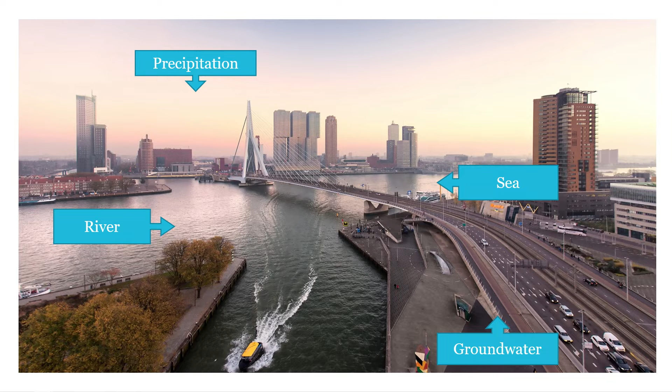Flooding in Rotterdam. Yes, we are a delta city. We live right next to the river, right next to the sea. So water is a real challenge for us as a city because water comes from four sides. We have the river flowing to our city, and when snow starts to melt in other countries, the water will eventually flow through our city. So we see rising river levels, and even areas of the city that flood maybe once or twice a year. And the people like living next to the water so much that they even accept things like that.

Then the sea. Luckily we have a storm surge barrier in the west, the Maeslantkering. When that closes off, the city is totally protected from the sea, at least for now. Groundwater can be a challenge: low groundwater tables during periods of drought, and we have those old homes that are founded on wooden poles, those poles rot and the house will shift, or higher groundwater tables when your basements will flood. And a lot of the basements in Rotterdam are transformed into bedrooms and kitchens. You don't want that.

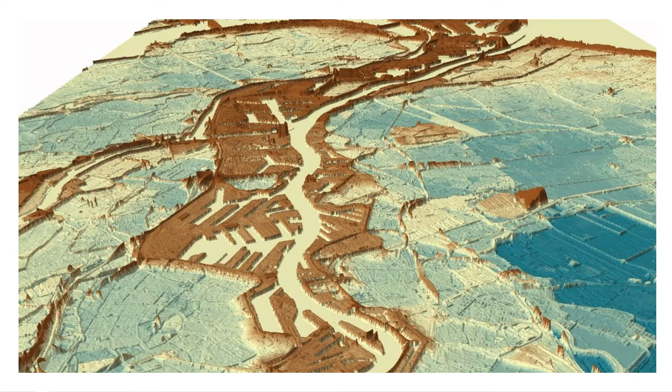Precipitation, rainfall is a real challenge for our city. And it was already said this morning, 85% of our city is below sea level. So everything that's blue in here is below the level of the river. So we have quite a good drainage system and around 1,100 pumping stations to keep our city dry. But we see with climate change and high intensity rainfall that our sewage system cannot cope with those amounts of water. So we have to do something to our city.

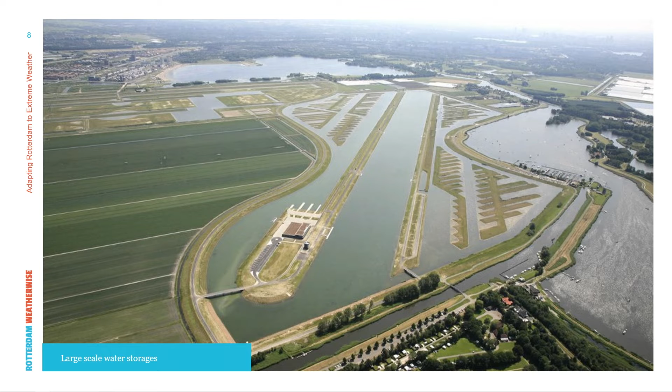So we have to work towards a climate adaptive city and really integrate climate adaptation into our urban planning. Let me give you some examples of that. It's about large-scale solutions, and this is problematic in a densely built city, large-scale solutions and multifunctionality. What you see here is a big water retention reservoir, but it also doubles up as an Olympic rowing track, so it can be used for rowing competitions.

And it actually helps in improving the retention capacity of our polder system, but it's outside of the boundaries of the city of Rotterdam. But we don't have space to do things like this, so we invest as a city in solutions that help in keeping our city dry, even if it's outside of the boundaries.

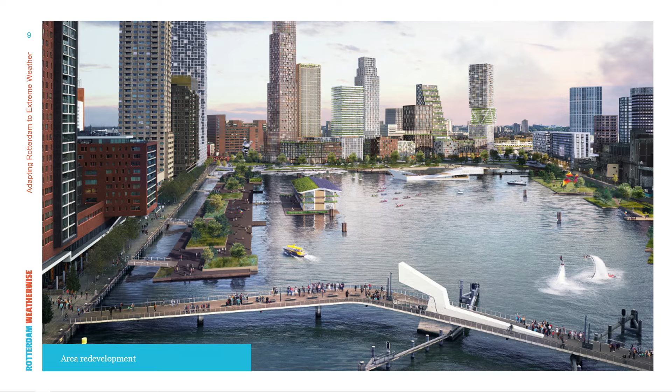Also, area redevelopments. We have a lot of former port areas in the city, and the ports gradually moved towards the sea. Unused port areas. This is Rijnhaven, and actually in the middle is the floating office of the Global Center on Adaptation. It will be transformed into a tidal park, so it increases the recreational value of the area. It's also quite interesting to develop there for real estate developers, but it also helps in flood-proofing the city, so it also has this multifunctionality in mind.

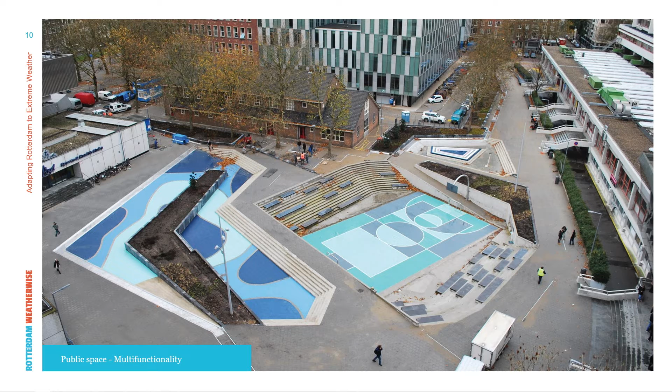And also on a small space, this is the water square. This was the first one, it's already 10 years old, but we have a lot of these all around our city. They all look completely different because we always design them together with the citizens. So they serve the purpose of water retention, and at the same time they can be used for sports and theater. And on this one, there's even a church that does services in the big reservoir on a sunny Sunday. But at the same time, 1.7 million liters of water can be stored here.

And one thing we try to do is link in with everything that's happening in the city. And a big opportunity for us is sewage renewal. Rotterdam is built on sloppy soil. We have 2,400 kilometers of sewage pipe which keep the city dry. This is really the core of a robust system. But the pipes, they just sink, so we have to renew them every 60 years. So we renew 40 kilometers of sewage pipe every year. So we also open up 40 kilometers of roads every year.

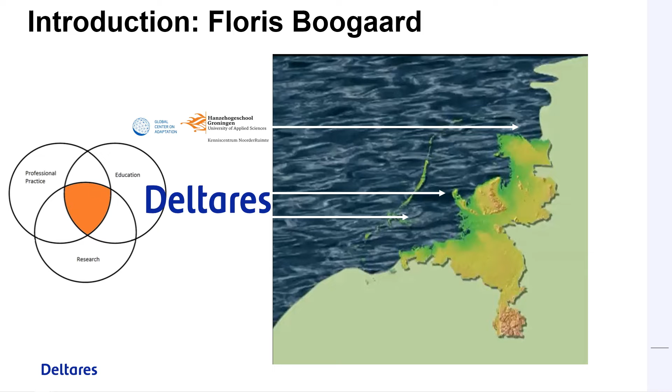Next slide. What I want to talk to you about in a very short presentation is a strategy for integral flooding solutions. And of course, we have a lot of challenges. We have a lot of solutions that we can share. And I think a major strategy would be to analyze the problems and the solutions, going to form an ambition, and then as soon as possible come to action.

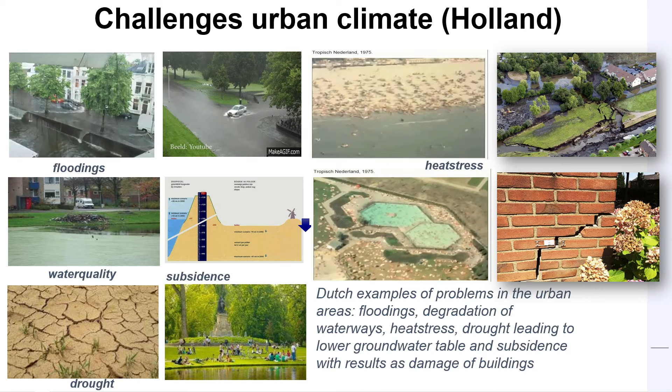Next slide. And just to show you some of the challenges that we face, Johan already named them, so I will go quickly over them. Of course, it's about flooding in this section, but if you cope with floodings, you will also do an integrated approach, also tackle heat stress or drought or subsidence, being in sinking cities, for example. And also, next slide, it has a very large effect on water quality, air quality, urbanization, more paved areas in the city that we have to solve.

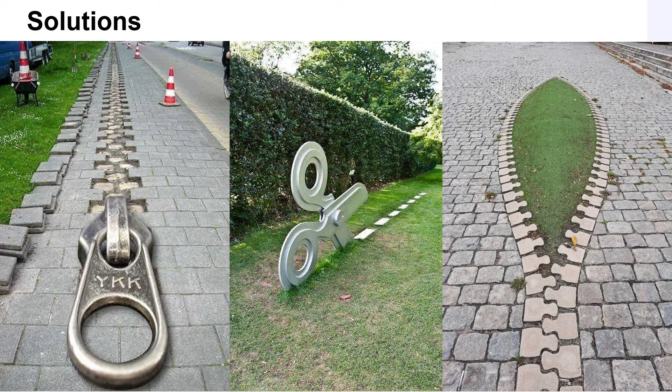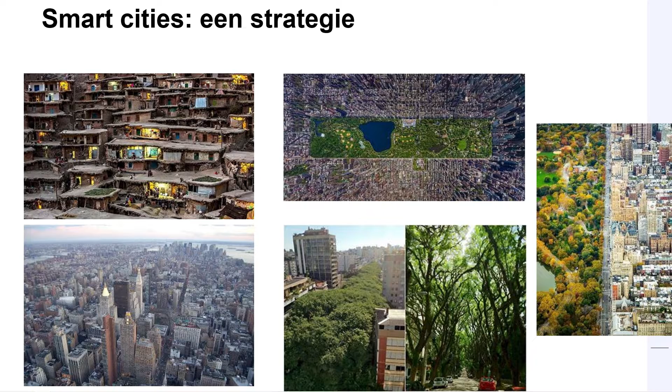So next slide. I think these artists visualized very well what we have to do. We have to open up the cities again and give more room for water where it can be stored and slowly infiltrate to the ground. So we tackle floodings, also drought, of course, and heat stress in a lot of situations. Next slide. And then you will see that cities are not planned that smart from the old days, as Johan referred to as well. We tend to give green less space, or just one space, as you can see here. Gray and green are really separated in this case. So one of the challenges is really to go with an integrated approach and to see how we combine them.

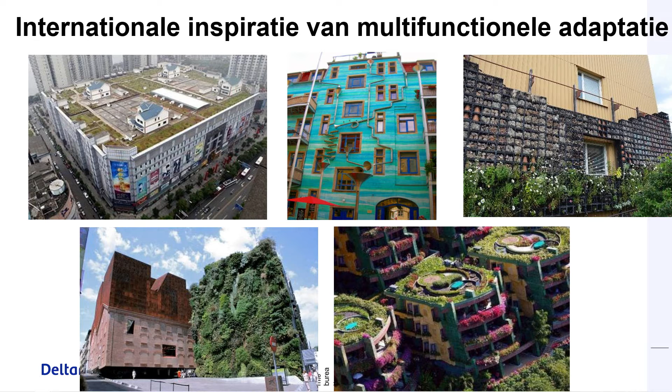Next slide. And there are some great solutions all around the world, as you can see here. Rooftops in China, you see autarkic homes in Thailand that are really self-sustainable. A very nice green wall, one of the biggest in Europe, in Spain, for example. And maybe one of my favorites is the one in the middle. You see some musical instruments on a building in Dresden. When it rains, it makes music. And every time it rains, it makes a different symphony, so to say. And people go out in the rain and tape the noise that it makes. So it should reach participation and stakeholders in this case as well.

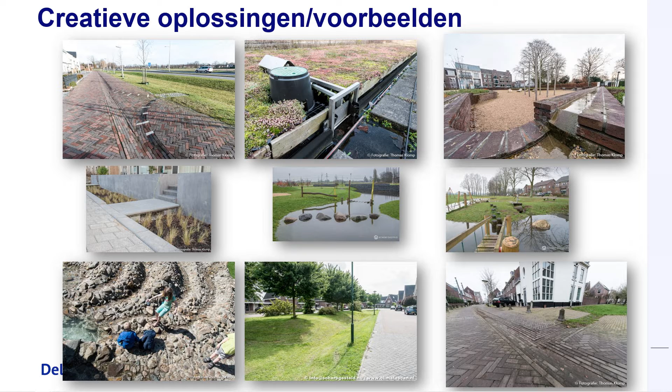Next slide. So there are a lot of solutions that you can find: swales, rain gardens, water squares, permeable pavement. Those are all small-scale solutions that you can implement in the urban area. Next slide. But of course, the big challenge is how to make that an integrated approach, because it's not only about the technical means. Most things can be solved in a technical way, but it's also about the infrastructure, or the bottom-up, or the governance, or the participation of people. And these are some tracks that we do at the Global Center on Adaptation, for example, and that is solution brokering. So offering solutions to your problems with inspiration from projects from all around the world.

Next slide. And as has been said, I think one of the main strategies in this short presentation would be first to analyze, see where your problems are, and it can be done by models.

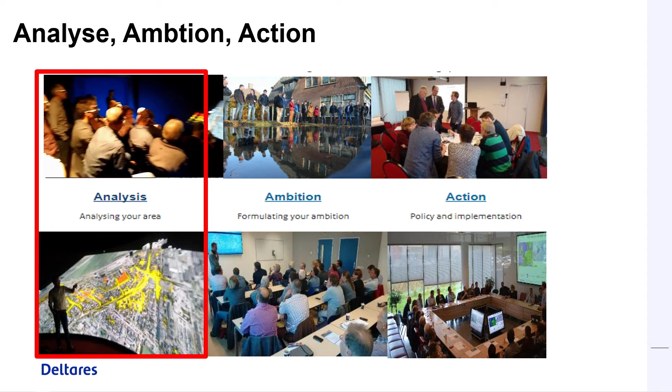I will show you in the next slide. And then you have an ambition, and then you also should go to action. And here's some climate quick scan models. It doesn't have to be exact; most of the people already know where the problems are, of course.

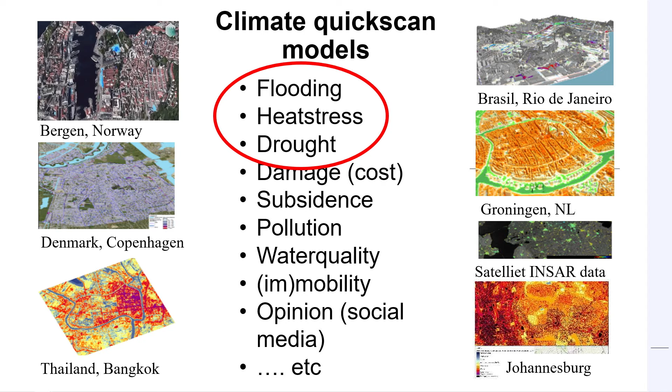And one of the things we're talking about is floodings, but you see a long list of things that you can easily model in urban areas that can benefit from an integrated approach. So it's not only technical, it's also about the opinion, for example. Social media can be modeled as well, so you can see what the perception of people is and combine that in a technical structure. And that's mostly an integrated approach.

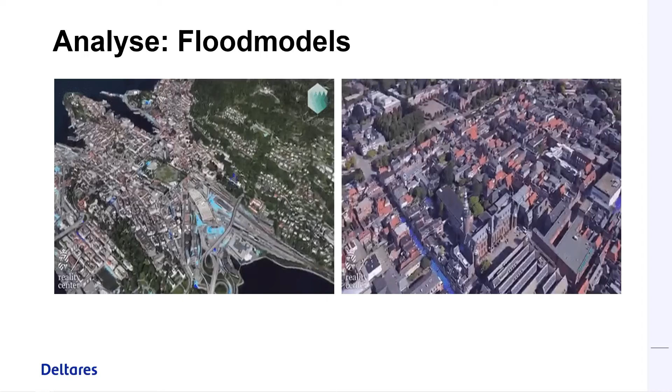Next slide. Here are some visualizations, 3D visualizations, how you can relate to people. You can fly through cities and see where the problems are, so they relate to the problem and are more attentive to give a solution to that.

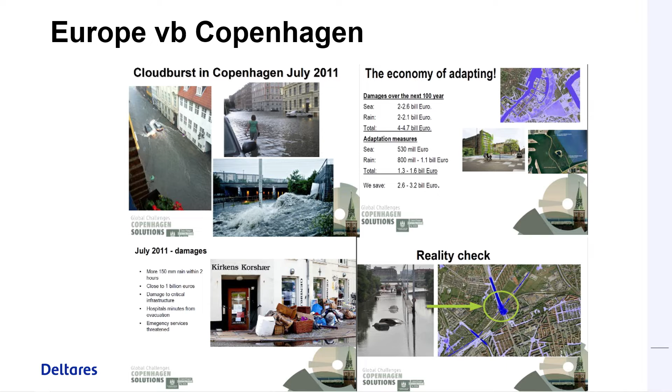Next slide. And it's always good to give an example. Copenhagen is a well-known example. In 2011, there was 150 millimeters in 2 hours on that city, causing billions of damage. And of course, it's quite a best management practice now because they came to action quite soon.

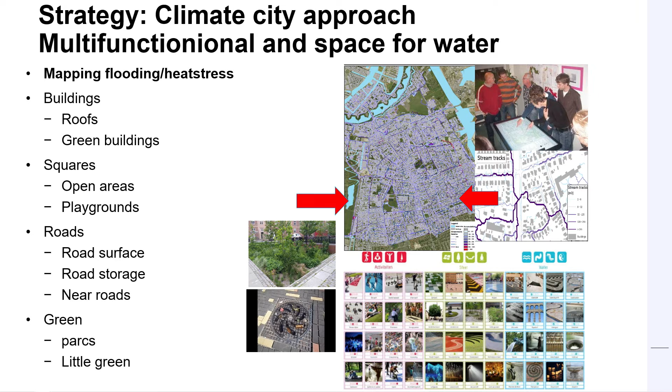Next slide. So I did some flood modeling there, as you could see the models before, and then it's basically a puzzle to see where your buildings are, where's the green, where are the squares, where can you make maybe water squares, as Johan was talking about, or other features to fit that into the city. So you can make it into a fun game, so to say.

Next slide. And of course, there are a lot more solutions. Here's some things in Dutch text because they're Dutch, so maybe it's an inspiration as well. So it's really greening cities, and well, I collect them in a tool that I will show you later, and you can maybe use that, for example.

Next slide. But it's very important to also know that you can implement them, you can design, you see great pictures of it, but also it has to work in the long term. Maybe 60 years, as Johan was talking about, for roads, but some municipalities have more 20 or 40-year cycles. So it has to be functioning, hydraulic capacity, but also people have to like it in the area.

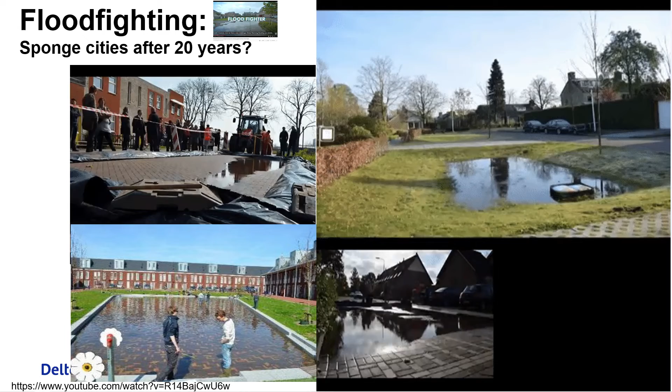And that's where flood fighting comes in. So we flood these systems that are implemented in the Netherlands already 20 or 30 years and see how they work, and we learn from them, and we spread that in international guidelines so you can benefit from that too. Next slide.

And all these guidelines and lessons learned from these projects you can find on adaptation platforms, and platforms are of course location specific. So here you see a lot of QR codes all around the world of platforms that you could use to find information about this, what works, what doesn't work, the lessons learned that I'm talking about. Next slide. And just to give you one example of that is ClimateScan. In this book, there are a lot of platforms that you could use.

Climatescan.org ticks a lot of boxes, so you can use it yourself to share your solutions and also to find specific solutions in Rotterdam, but every city around the world, for example. So next slide. And what is nice, this is a Google-based map. It has over 8,000 now. So you can visit areas like South Africa, as has been indicated, or Europe. You can go to Malmo in Sweden, of course Copenhagen that I showed, and you can share those solutions and get more information about it.

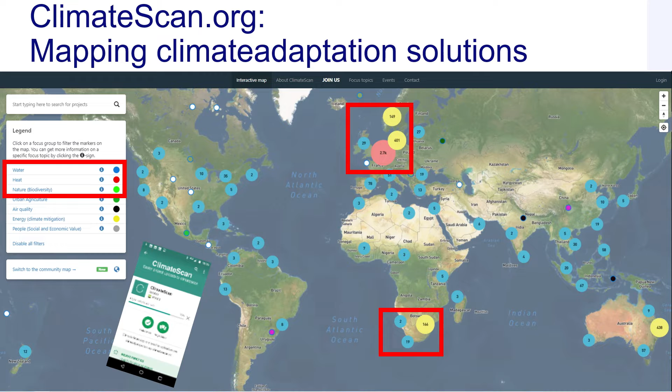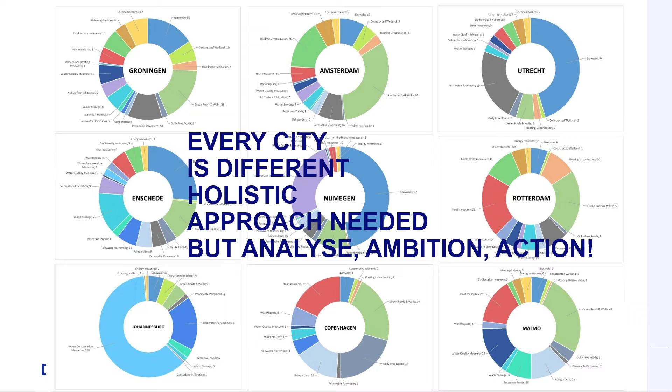Next slide. And with this, you can find the DNA of cities, because no city is the same in the world, so to say. So it needs a holistic approach, an integral approach to flooding. And in these pictures that you see here, also Rotterdam is there, but a lot of other cities as Johannesburg or Malmo or Copenhagen, you can see what the DNA of a city is.

Sometimes a green roof works, or sometimes more bioswales, or Wadi, as Johan called them, which is actually an Arabic name, so probably a lot of you are familiar with it. So with the DNA of these cities, you can find your own strategy, which makes it difficult as well.

But follow the strategy of analyzing, form your ambition, see what kind of cost, governance, or space you have to implement these measures, and then of course come directly to action and learn from it back, as you saw in those tools. So basically that's my message.

Next slide. I hope this has been helpful, that you can use the tools, that you can share that knowledge. Next slide. And of course, I hope, next slide, that Deltares could help you out with all the challenges that we have around the world. Thank you so much.

Thank you, Professor Floris. Indeed, it's nice to learn how we can, as countries, learn from each other, how each country deals with the flooding. So it's a good presentation.

Thank you. Now we will go to Mr. Martin Knuijt, a founding partner of OKRA. His strength is defining strategic visions and scenarios and creating strong spatial designs. He's mostly active in designing complex urban and landscape development projects. So Mr. Martin, you can start, please.

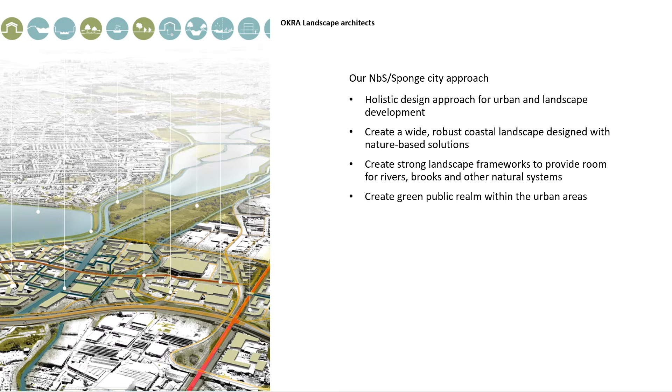Then gradually we started working on the green and the blue structure and defining it with typologies, so that the blue typologies could also be part of the green areas, but also linked to the urban areas, so that urban spaces were also connected to the water system, and the sponge is not only working in the urban area, but in the green areas as well.

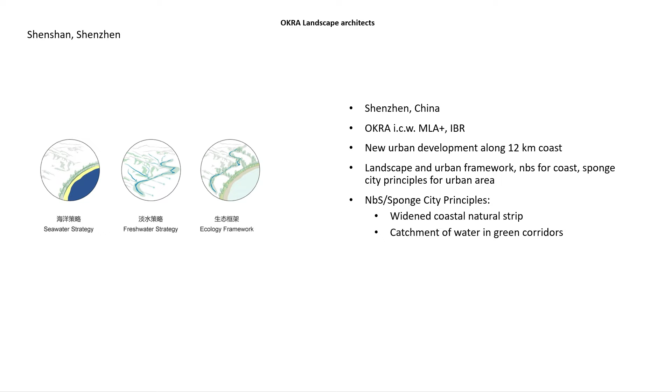For the coast, it was important to create this robust landscape that should be so strong that sometimes it can lose some of its dimension, and sometimes it can gain some extra space, because the sea also sometimes gives instead of taking. It also should provide room for ecology and recreation, so it becomes multifunctional. The wider you make it, the stronger and more robust it will be, but also the more meaning it will give to people.

So that was actually the first asset, which creates, in fact, various cities. So it's a pearl necklace of cities instead of just one big city along the water. And I think here you can see that landscape and urbanity are integrated and bring a new future for cities.

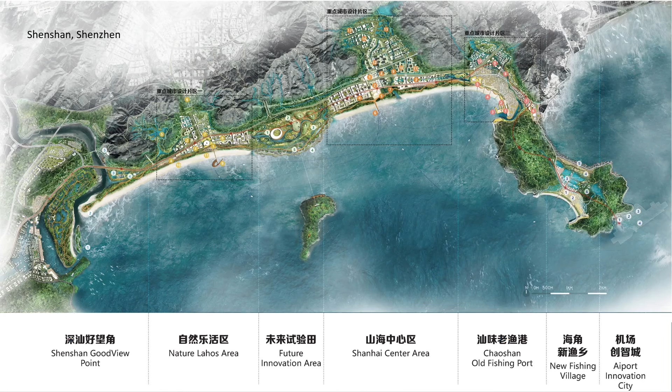The next project that I would like to show is the London project. I was a bit ahead of what was clicked. We're now moving to London, Meridian Water.

That's one of the largest building locations in London along the River Lee, which is a side river of the River Thames, the most well-known river in London, of course. And since the city is actually expanding, they are in need of creating a lot of housing. And in our view, you should combine, again, green with housing.

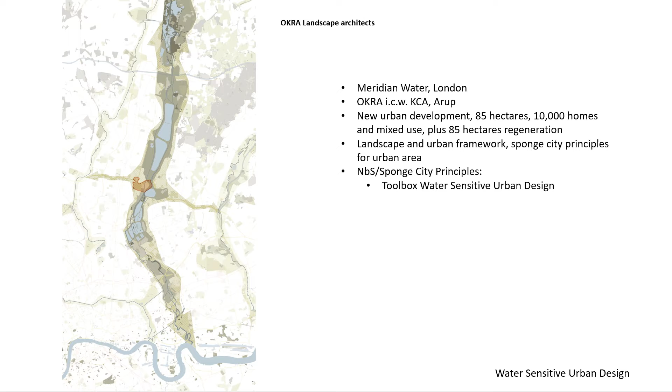So the number of housing is of course very high, but you should still create for sponge city principles and create what we call a toolbox of water-sensitive design. That's crucial, we think, to tackle the new needs for the city. In fact, the city is also changing since they create Crossrail, which is a super infrastructure rail system. These locations at the outskirts of the city become closer to the city and will be there in 15 minutes

from the city center. And again, we say, start a holistic approach and define the tools for water catchment, water storage, reuse of water, and water in public realm prior to urbanization. And of course, there was the urbanization program of 10,000 homes on 85 hectares. There was also the program of creating a better space for residential areas adjacent to it.

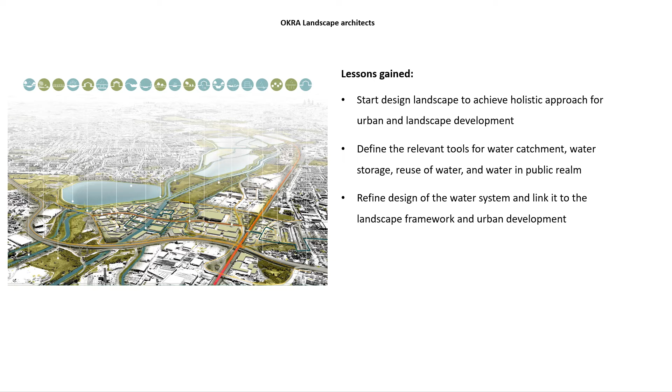But we said, well, please start with the green. And they accepted this proposal and said, well, okay, yes, we're going to link it to landscape framework and urban development. To do so, we have defined some tools. And you could say that if you provide tools, you can have them in 4 categories. The first one is, please do something upstream.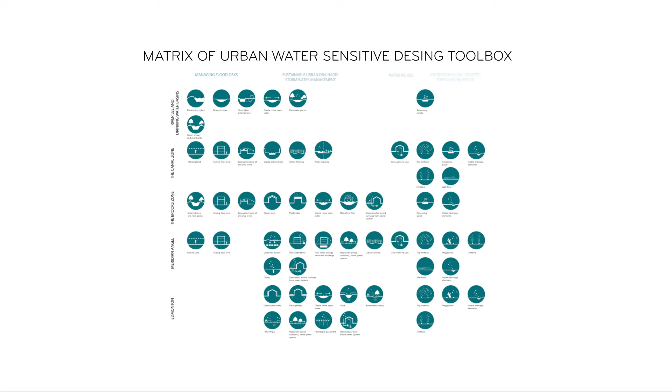If you capture the water problem upstream, you prevent the area from flooding if there's a problem on the higher parts of the river. Then secondly, you need to provide a good area that you're not causing the problems downstream. So within the urban area, you should have several tools to capture the water, to store it, to filter it, and bring it in small doses to the river.

The third category is, I think, about recycling and water quality. We are, of course, always thinking about quantities, but in urban areas, quality is as important as quantity. If there's polluted water, it affects the groundwater table. And in all metropolitan areas, I think water supply for drinking water is already at stake and, if you don't do the right things, also a bit in danger.

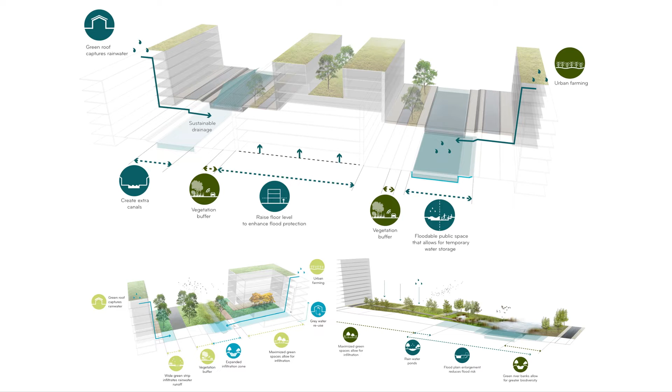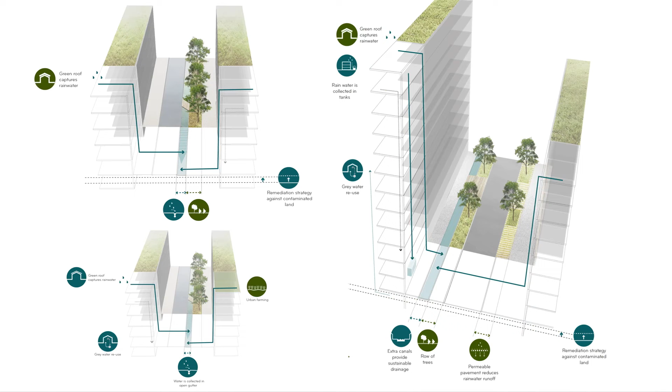And the last category, I would also say, make water visible in the urban areas. So make it as a pleasure. So we designed some sections and showed how these tools could be applied in a design way. Otherwise, it becomes technical. And of course, technically, you can solve everything. But if you want to have people's awareness, in fact, you should design it as well. So some more pictures of how that works are the next ones.

And we have worked on the first area. This is the development area that is actually the starting development. We said also, even in phasing, you can do this. So if you start developing, maybe first you should make green nurseries for trees, and maybe you should create already the green structure prior to building.

The last project, here again some images of how that works in the small scale and how the tools are connected to the map. You could see that it gradually works down to the small scales, and that in the end you see this biosphere in the neighborhood, in the residential area.

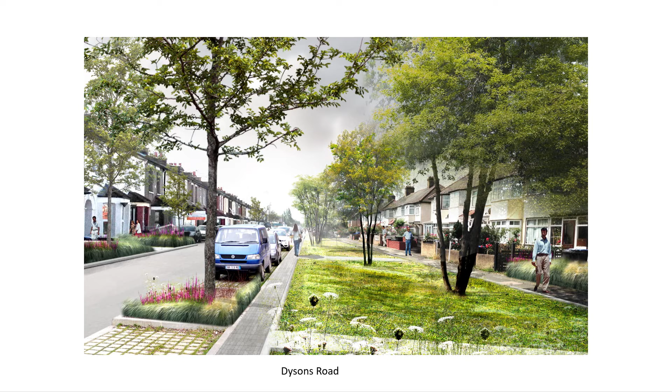But it all comes together to work with the big scale and the smaller scale, starting from the green framework and then gradually bringing it down to, let's say, the human scale. And in the end, the eye-level perspective, so that people that are living there can understand what we mean with all these abstract tools and diagrams.

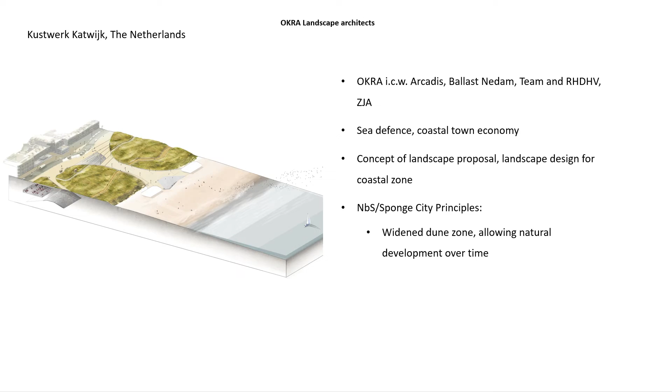Yeah, the last project I would bring forward is a project in the Netherlands, Kustwerk Katwijk. It is about sea defense and coastal town economy. In fact, what we can learn from this one is that, again, a holistic approach is required. Before we started here, the engineering solution was at the table, and then the engineer said, you can make a big dike in front of the coastal town, and then it will be protected.

Of course it will be protected, but all the inhabitants, they were really angry. They were upset because the coastal town was always connected to the sea. So in fact, the government wanted to provide something good for the people, but people said, well, we want to experience that we live by the sea. And that social part was actually at stake.

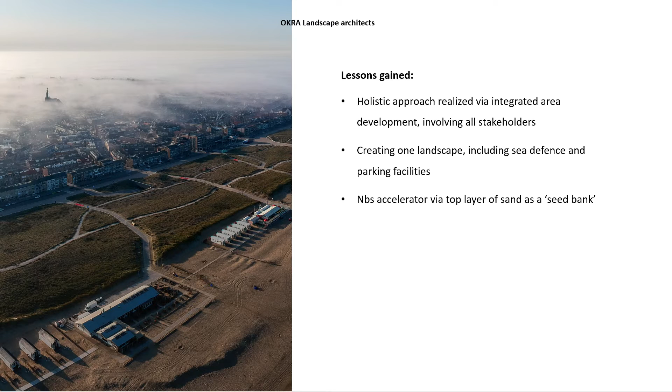So we said, yes, we can make a holistic solution, but then we should maybe enlarge the problem a little bit more. So not only the coastal problem, but also the urban problem, the parking problem, and other items that were at stake in the urban area. And creating this holistic approach meant that we said, well, we can make large dunes instead of only having the dike, and that might be as strong as possible.

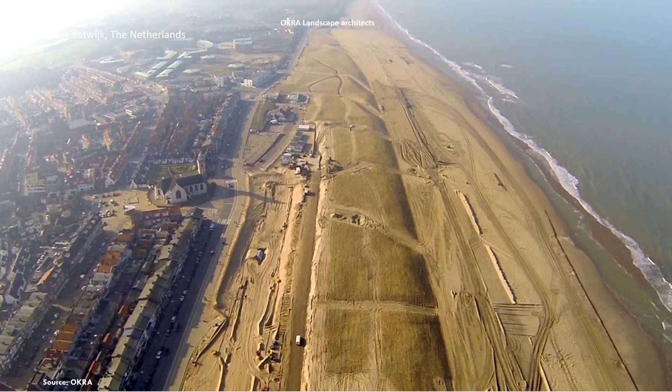Then the engineers were calculating, and we can thank them, the Dutch engineers, they really do great work. They said, well, yes, it can work. And in fact, here you can see an image that we created a parking facility as well. So within the sea defense, a special area was in a dike, and you see here the building pit for a parking garage. So gradually we made this landscape, which is already robust for coastal defense, but also for finding the solutions for the parking problem, so that the boulevard became better and the city became better connected.

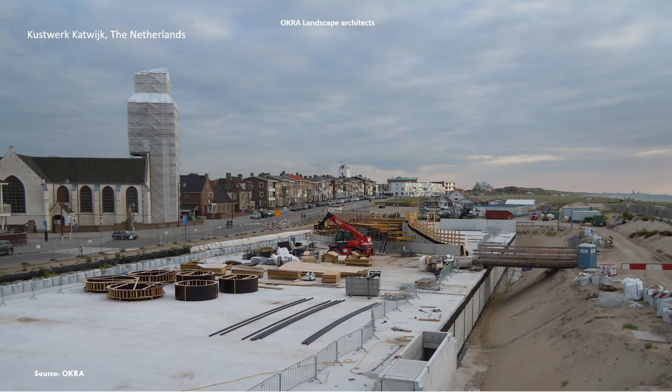Meanwhile, as you see there during construction, these were, of course, technical works, but we had to persevere. And the good thing about this, the lesson you can take from it, is that everyone was involved. So it was the national government, the provincial government, the water boards, the people from the town. But it was also the engineers. We as landscape architects, the architects were involved. So it was a collaboration. And if you want to achieve this, I think you should work all together on this water management.

And starting from, let's say, what do we want to achieve? How can we create a kind of interesting dream landscape that is our new city, that creates our perspective on the better world, and that really is dynamic and ready for the future?

So some more images you can see here on the photographs, that in the end, after a long period of working, it was realized. And if you walk here, you will never experience that there is just a dike underneath, or that there is a parking garage underneath. You think it's a dune landscape connected to the town. I think that's important, that perception. And gradually nature will take over. And that makes these nature-based solutions have a potential to create force for long periods.

Next, please. No more next.

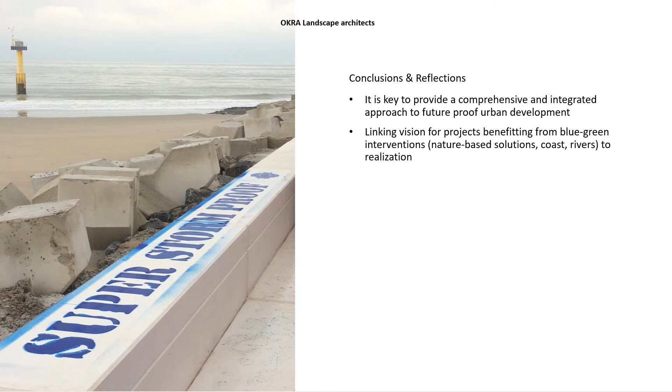Thank you, Mr. Martin. Really, it's an interesting presentation. I like how we should stand together to solve this problem. The government alone, it's not possible to solve this problem. So we should stand together, citizens, the civilians, all the government, all the organizations in the country to solve this problem. Thank you again.

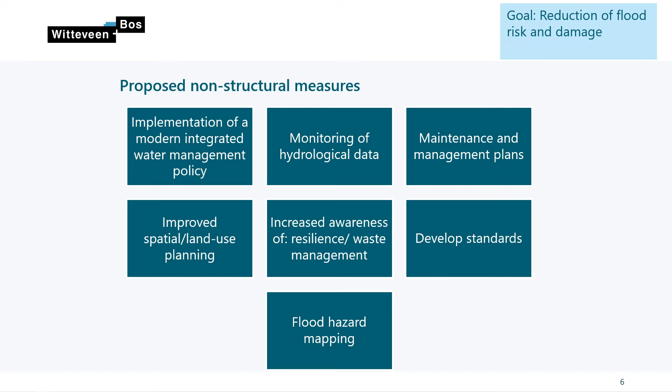And now I think we have to go to the one before the end, one extra.

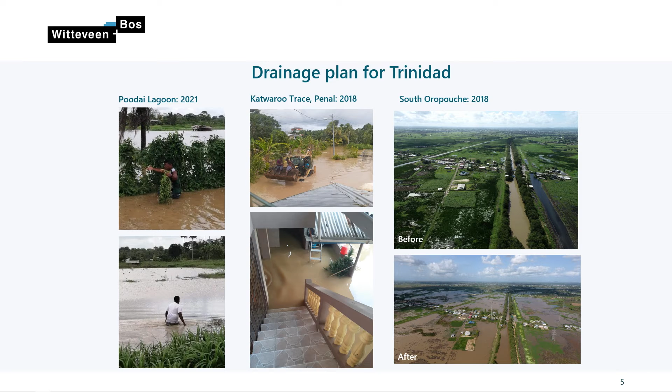Now we go forward in the sheets. I think the Mozambique. Next one.

Next. Yes. In Mozambique, we did a green infra project. It's an older project where we worked together with several partners, among which is also Deltares, which is also presenting here. In this project, we looked at the solutions for the improvement of the local drainage system and to solve the problem with local flooding. We did it in close collaboration with the people living there and the local government: what is their opinion and how can we address their solution in the program, and by the introduction of nature-based solutions in this area.

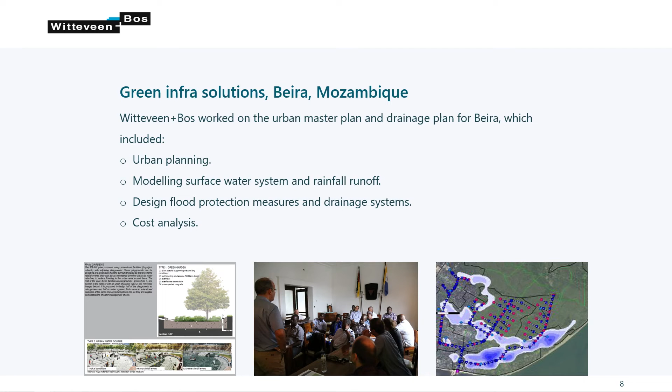Now I go to the next sheet. This one is one from our colleagues in Belgium. We prepared the water plan for the city of Antwerp. We started at the scale of the whole city and defined ambitions and principles together with local governments and stakeholders. And in the next step, we identified solutions for flooding at the level of the neighborhood and developed standard design principles for streets.

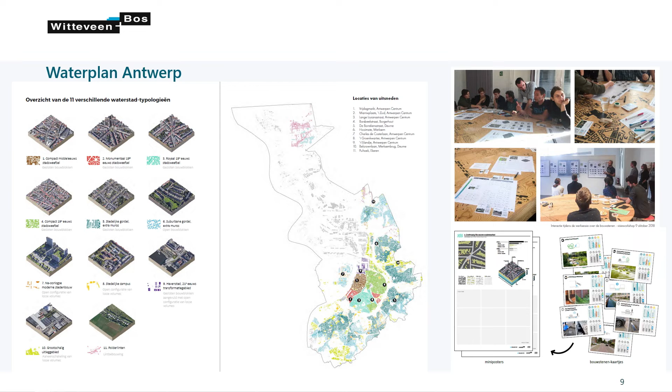And these measures do not only result in water retention, but also reduce heat stress and make the area more pleasant to live in. And going to the next slide, maybe. This is also about Antwerp, and we go to the next one.

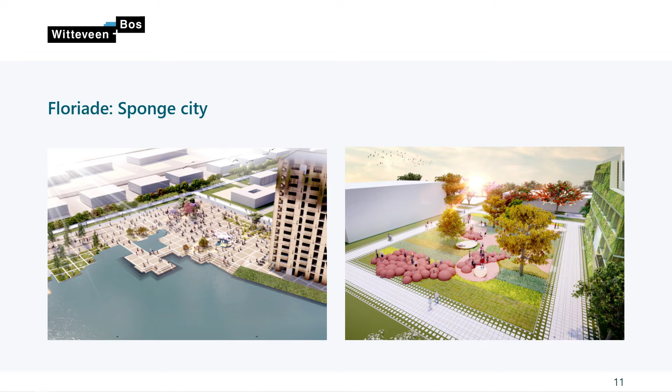This is the Floriade in the city of Almere in the Netherlands. The Floriade is a 10-yearly exhibition in the Netherlands. Originally, it was based on horticultural developments in the Netherlands. The theme for 2022 will be greening of the cities. And after the exhibition, the area will be transformed to a residential area. What I want to show here is the water retention at a local level. Maybe you can show the next slide.

In this case, on the plots. The purpose is to reduce the discharge to the local stormwater system and at the same time save water for a dry period, because it will be quite a green area. And the goal is to keep the existing streams where possible. For all developers in the area, it's mandatory to have minimum water storage at a plot level. They are free to choose how to reach it, but the options are, for example, bioswales, water retention on the roofs, or the implementation of water tanks.

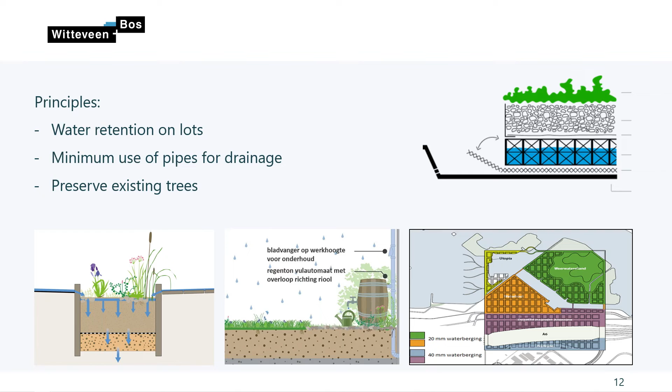And at last, I want to summarize this presentation with the lessons we learned in our projects. At first, what we learned is that in most cases, single-purpose measures to deal with local flooding are not cost-effective, and we have many more challenges in the cities. Therefore, we propose a multi-purpose approach to deal with the challenges in urban areas.

The use of the sustainable design principles helps to address all themes that have to focus on future-proof, resilient design. In this approach, stakeholder involvement, including private landowners, is essential. These sustainable design principles can be applied to all kinds of projects, not only urban flooding. And when you look at the slide, you see a link to a video where you can find more information.

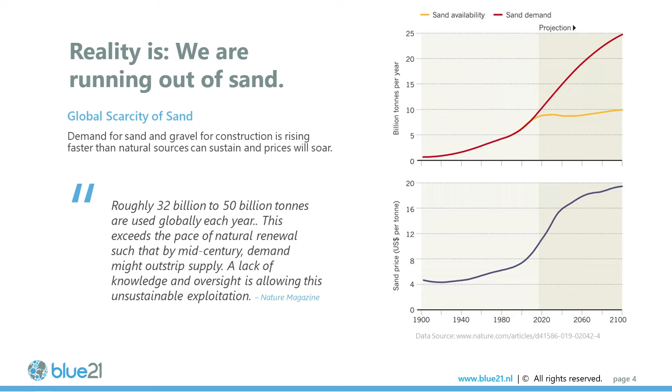But the reality is, next slide please, we are running out of sand. The demand for sand and gravel for construction is rising so much faster than natural resources can sustain, and the prices will only soar. Land reclamation is in fact not the only solution to create extra space. Next slide, please.

At Blue21, we have been investigating creating new space on the water. We could create space for food production, energy production, and extra space for living. We could capture the nutrients that are discharged by cities nowadays and reutilize those nutrients into food and energy production, for instance, and close the loop, creating a circular economy.

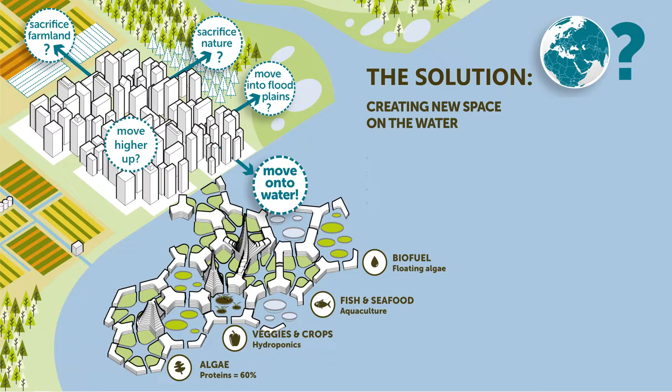Next slide, please. So what is floating development? Floating development usually consists of two parts. There's the superstructure, buildings on top or other functions for living, for recreational purposes, or for logistics, food and energy production. And there's also the substructure or the floaters, which is usually built with steel, concrete, amongst other materials. And this whole structure is usually moored to the bottom of a water body or fixed to a quay wall so that the whole structure doesn't float away.

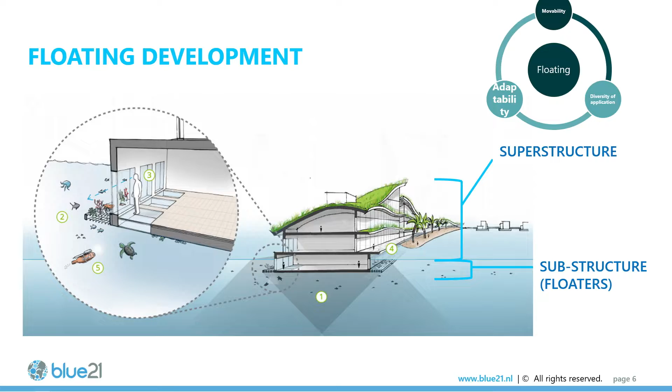With floating, it's adaptive to changing water levels. You can move it and create a more dynamic geography and adaptive urban planning. And you can introduce various functions on floating structures. Next slide, please. So in many cases, floating is actually more beneficial and more cost efficient in comparison to land reclamation, especially in deeper waters or in areas where the ecosystems are more environmentally sensitive.

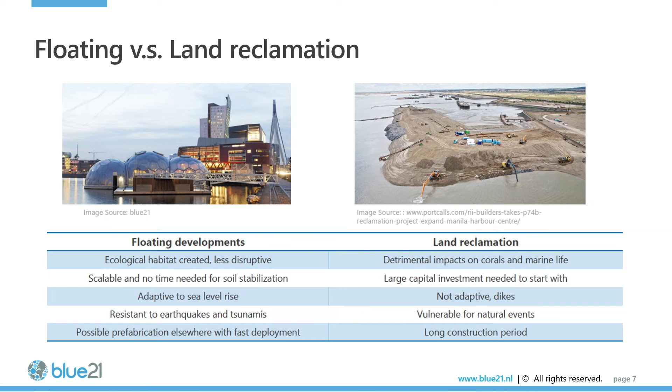And in fact, there's an increasing momentum at the moment. Next slide, please. In 2019 and 2020, UN-Habitat organized two high-level discussions on sustainable floating city development as a viable solution to climate change, to providing affordable housing, etc. And the main conclusion from these high-level discussions was that there are calls for action to actually design a floating city prototype and to organize a brain trust with increasing science and knowledge to guide such an initiative.

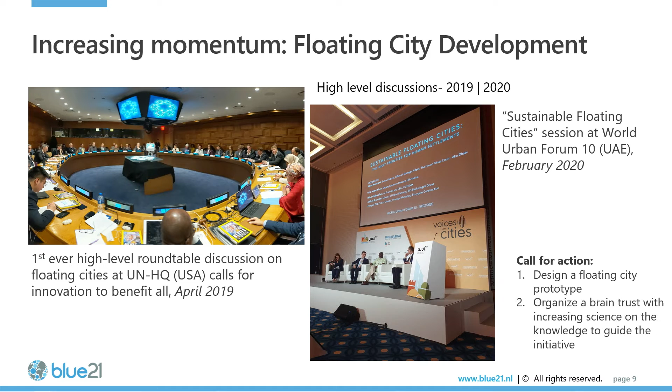And recently, next slide, please. Recently, this summer, two cities have stepped up to actually implement a floating city prototype development, that being Busan City in South Korea and also Singapore. So more and more momentum and interest and attention to such an alternative solution.

From our side at Blue21, one of the largest floating area development projects that we are working on at the moment is in the Baltic region. Next slide, please. In collaboration with FinEst Bay Area Development, a Finnish company, and a Japanese company, Shimizu Corporation. Together with them, we are looking into providing resilient and future-proof large-scale floating area development in the Baltic area. This is also in association with the tunnel initiative, which aims to connect Helsinki and Tallinn with two tunnels.

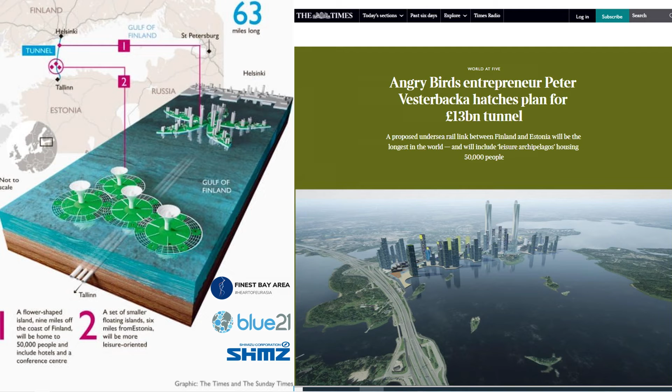So next slide, please. In fact, we are entering a new development phase with large-scale floating development. Floating is not something new anymore. In the past, you see fishermen or indigenous people living on water. More recently, you see more examples of sustainable floating districts being built and large floating structures. So we are entering a new phase and closer towards realization of a floating city. Next slide, please.

And recently, we have also realized a floating solar project. And last year, we completed a research study on Space at Sea, providing sustainable and modular living space at sea for different functions in collaboration with 16 other European partners.

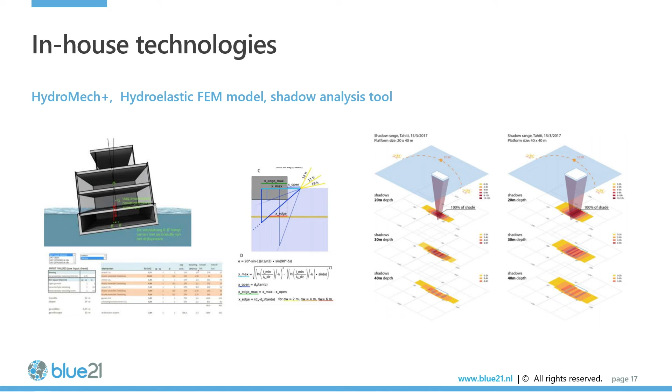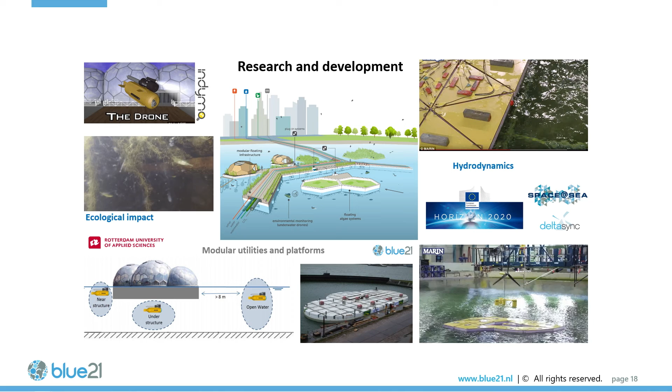We conduct quite some hydrodynamic studies using various tools to understand, for instance, the elastic behaviors of very large floating structures. We also analyze effects of shadows that could be produced from floating structures. Next slide, please. So these are... next. Yeah, thank you. These are some images of our internal R&D. Next slide, please.

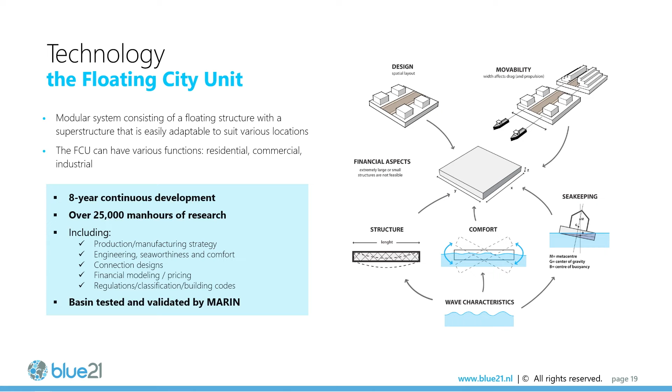This is something else that we've been working on for quite some time, which is a floating city unit: a modular unit design that incorporates utilities connections, which could be easily introduced to different environments and be built, such as Lego blocks. Next slide, please.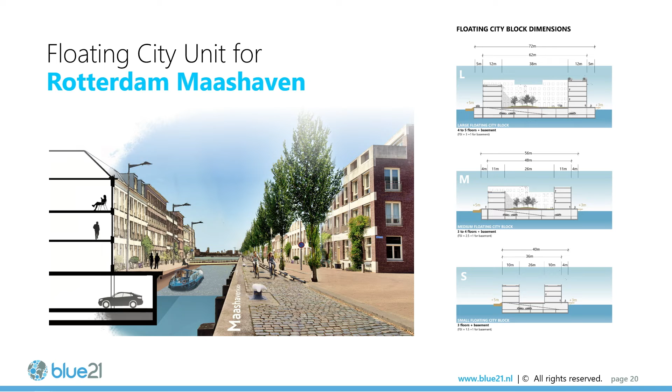This shows an application for areas, for instance, in Rotterdam Maashaven, where we could provide a larger floating district and a more adaptive living environment that could also have the potential of being towed elsewhere in the future to cater to other needs. For instance, some old port areas also need redevelopment, and floating could be quite an interesting solution for old port areas. Next slide, please.